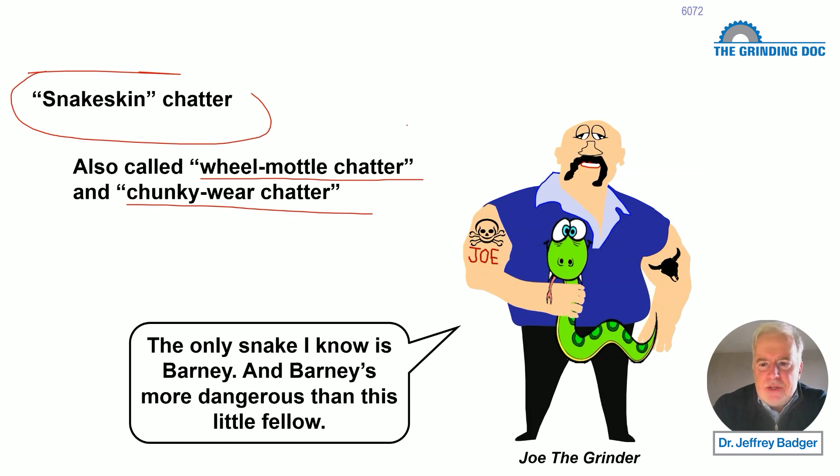The most obvious solution, but there are several solutions, then we'll look at the most obvious solution. So here we have some pages from the Book of Grinding, and we're going to talk fundamentally about what is snakeskin chatter, one type of chatter of many. So snakeskin chatter, not to be confused with fish scale chatter, not to be confused with other types of chatter. I've seen it called wheel-mottle chatter. I sometimes call it chunky-wear chatter. And it's just a certain type of chatter, and we're going to talk about what that type of chatter is.

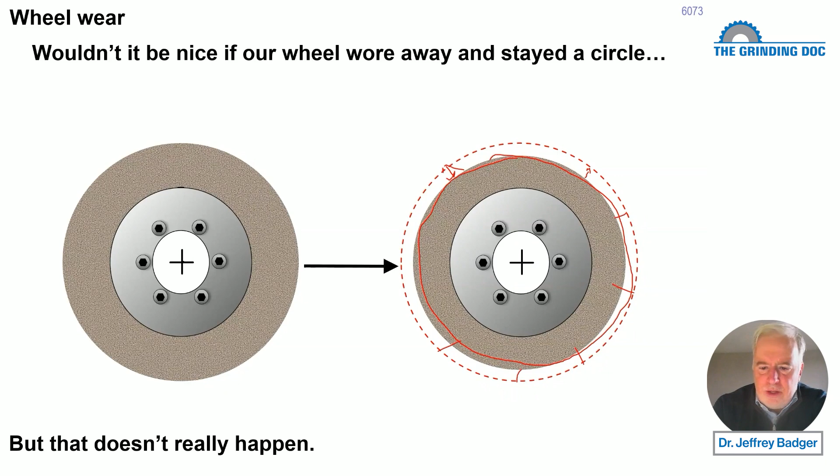Now, it would be nice if as we ground away, our wheel wore evenly all the way around the circumference. So it would be nice if we ground for a few minutes and the wheel wear was 5 microns, 2/10,000ths of an inch, consistently all the way around. That would be nice, but it doesn't work that way.

Some parts of the wheel are a little softer, some are a little harder, some have more bond material, some have less. Some for a split second got a little more coolant, some for a split second had a deeper depth of cut. A bunch of factors, but what it means is wheel wear is not even all the way around. So if wheel wear is not even all the way around, what's going to happen?

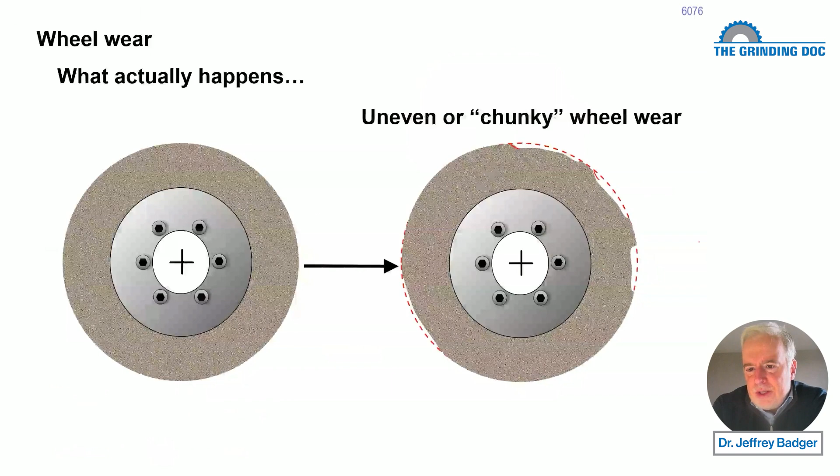We're going to get intermittent contact. And what's going to happen then is, as we get to this part of the wheel, we're not removing any material because we've worn away, or we're removing less material, or the grit penetration depth is smaller. So what's going to happen? That's going to cause even greater wear on these entrance areas, and then it's going to cause even greater wear. So now I got a wheel that's not round, it's kind of funky shaped.

And when it's funky shaped, maybe it looks something like this. Now I've exaggerated these gaps. Obviously, they're not nearly that big, but there they are.

So now what's happening with this wheel? Well, this wheel is going dang, dang, dang, dang, da da dang, dang, da da dang, as the wheel traverses across the workpiece. Kind of like going to a nightclub in the 1980s, listening to some techno. And when we get that, what do we get on our workpiece? We get a funky shape on our workpiece, a funky pattern.

However, it doesn't work this way entirely. Why? Because on a different part of the wheel, maybe further over on the width, we have a different wear pattern, because there's nothing to say that that wear pattern along the entire width of the wheel has to be the same all the way down. It's going to be different.

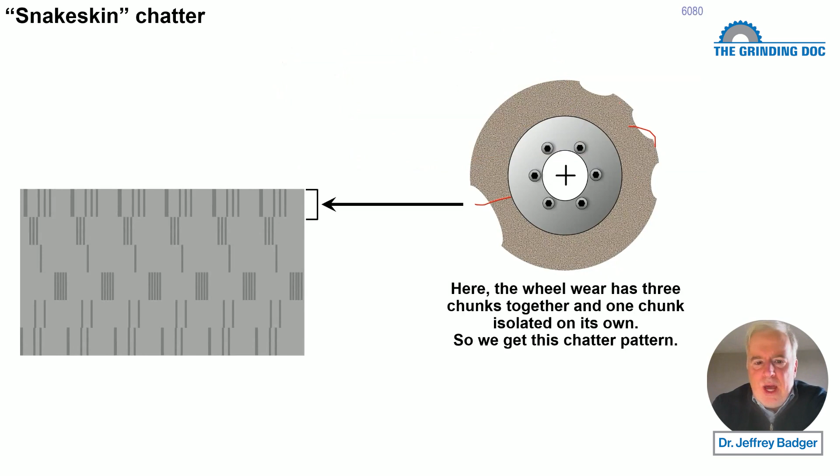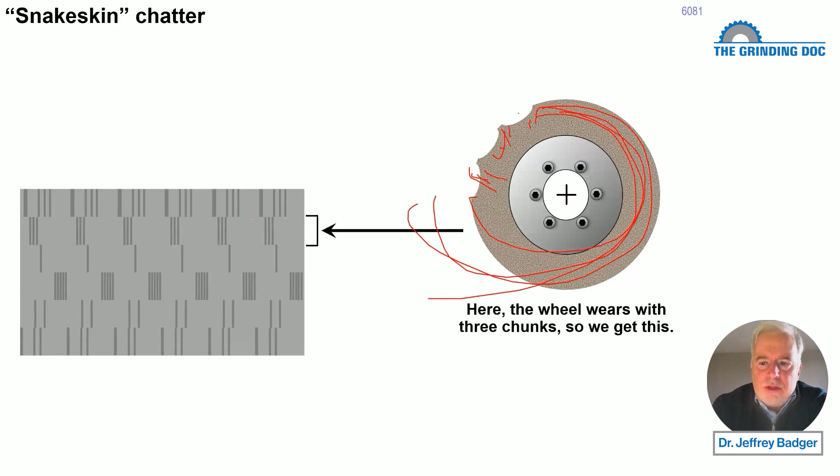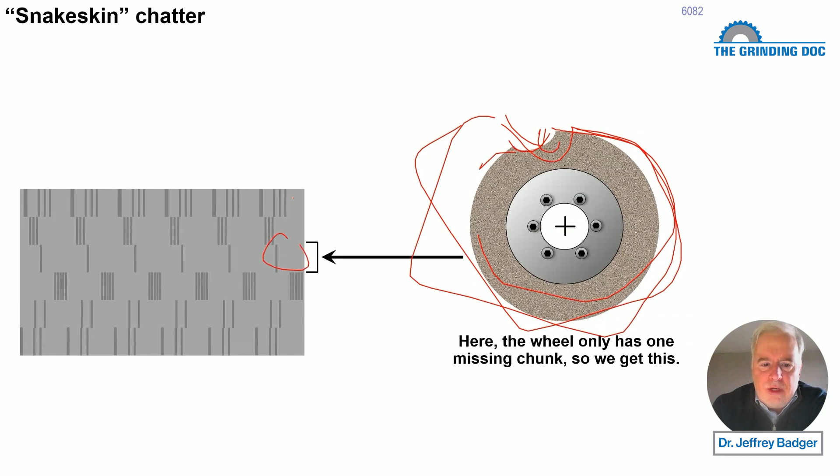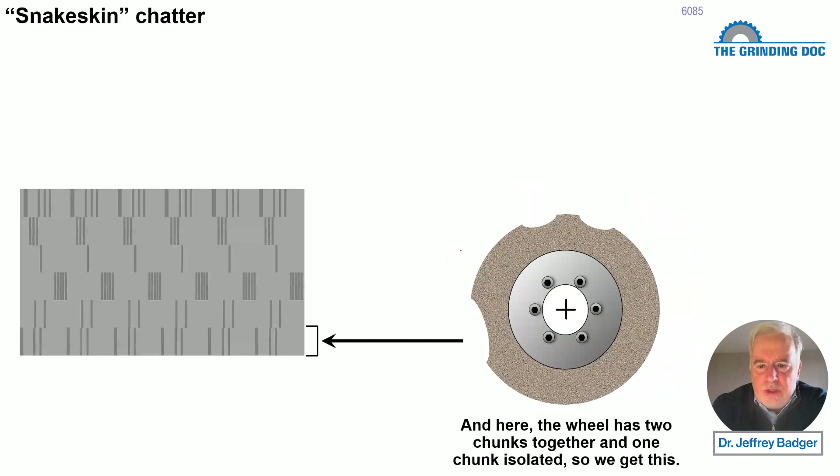So what's going to happen over here is we've got a certain rhythm of clicks, but a little bit over here we've got a different rapid pattern, and we get this shape. A little further over, we've just got a slower pattern, and we get this shape. And over here we get another pattern, and then over here some other funky pattern, and you get some kind of weird pattern on the workpiece.

You can tell some clues about whether or not you have snakeskin chatter from this. Number one, are the chatter marks evenly spaced? If they're not, that points to snakeskin chatter. If they are, that points to some other type of chatter.

And are they the same along the entire width of the workpiece? If they are not the same, that points to snakeskin chatter. If they are, let's go back to this one, then maybe it's not snakeskin chatter.

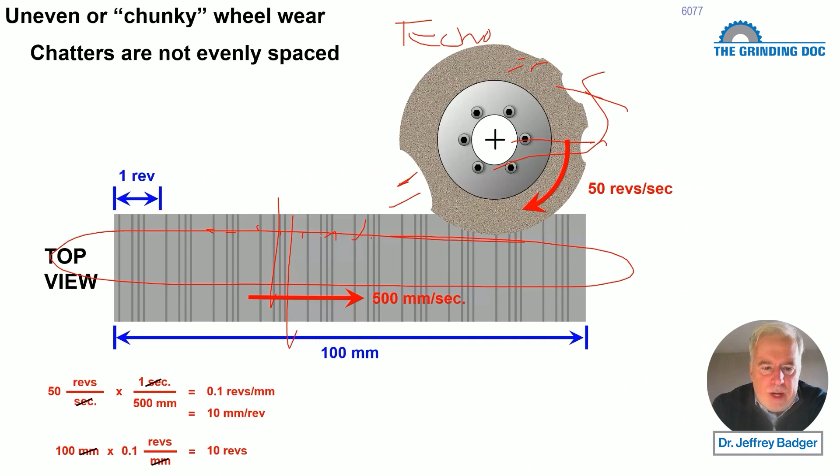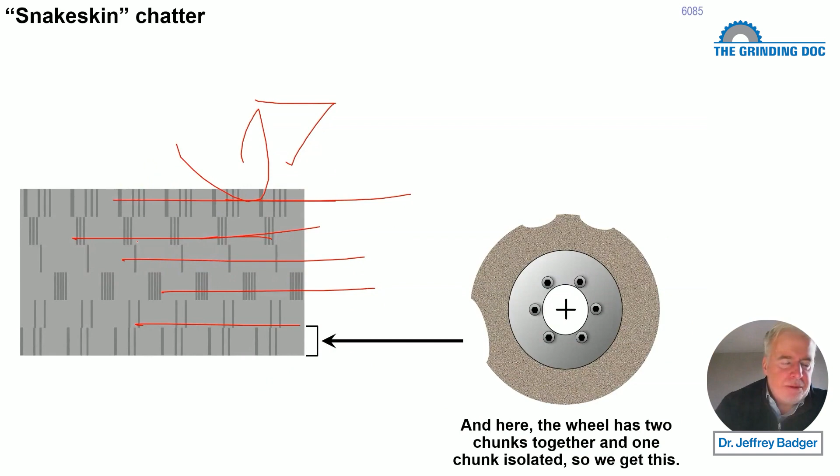But now we've got to be careful, because what if we have crossfeed in surface grinding, or what if we have traverse in cylindrical grinding? Now we're hitting at different points, and we've got to be careful, because sometimes other types of chatter can look like snakeskin chatter. So we've got to be careful about what's going on here.

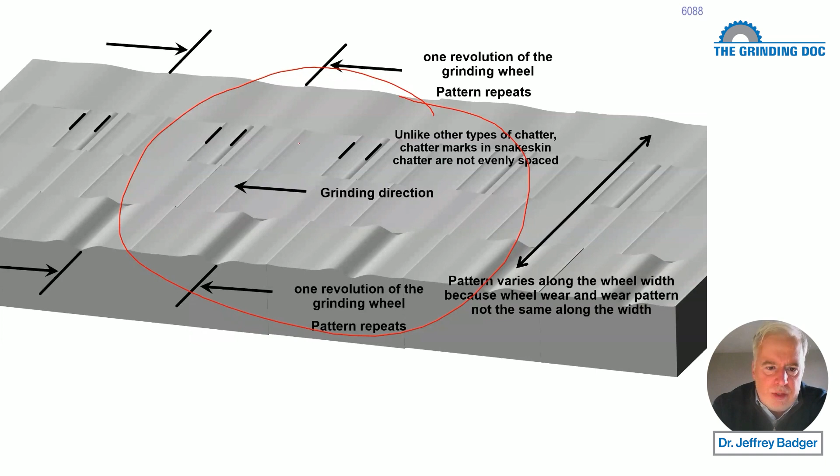Now, I wish I had some better pictures of snakeskin chatter, but I don't. So here's a typical profile, theoretically, of what it might look like. Weird waves over here, and another weird pattern over here. You just get a funky type of pattern on your workpiece.

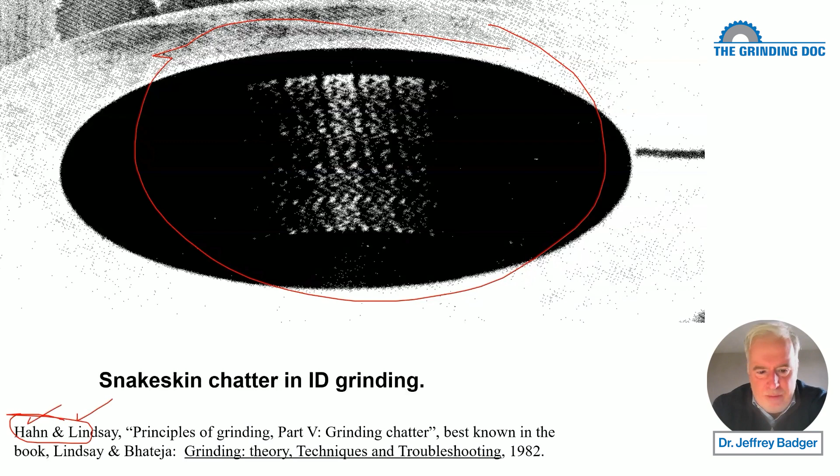Here's a picture from an article back in 1982. It's the only good one I have, really. It kind of shows what they called the wheel model chatter, from our friends Hahn and Lindsay, two very smart guys. One of them passed away at the age of 100 recently, in Lindsay and Bhateja's book. And we get this funky pattern on the workpiece.

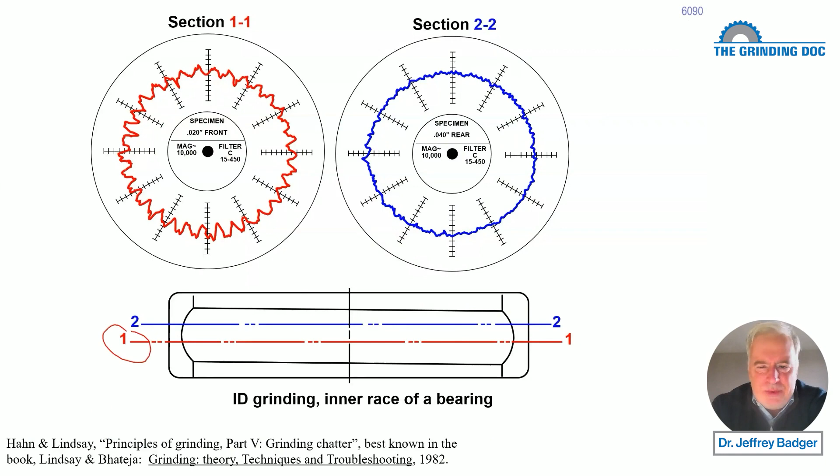Okay, and it's different. Here's a bearing race where they claim, hey, we got pattern number 1 over here, pattern number 2 over here. They're different. You can kind of map these things out, get a marker, draw where the chatter marks are occurring, and try to figure out if you're getting chunky wear chatter, what I call snakeskin chatter—both names are fine—and try to figure out what's going on.

Now, what's the solution? Dress the wheel. Dress the wheel, snakeskin chatter goes away. If you dress the wheel and your chatter doesn't go away, you probably don't have snakeskin chatter, okay? Because what that does is it makes the wheel round again. Again, we just want to make the wheel round, get rid of the chunky wear pattern that's going on, okay?

So that's one type of chatter. Half the battle in chatter is figuring out what type of chatter you have. And this explains the fundamental causal mechanisms of snakeskin chatter. You can mess around with solutions of making your wheel harder, making your wheel softer, trying to get the wear more consistent. Maybe you can pull it off, maybe you can't. The easy solution is just dress your wheel—dress your wheel, the problem goes away. So that is an explanation of snakeskin chatter.